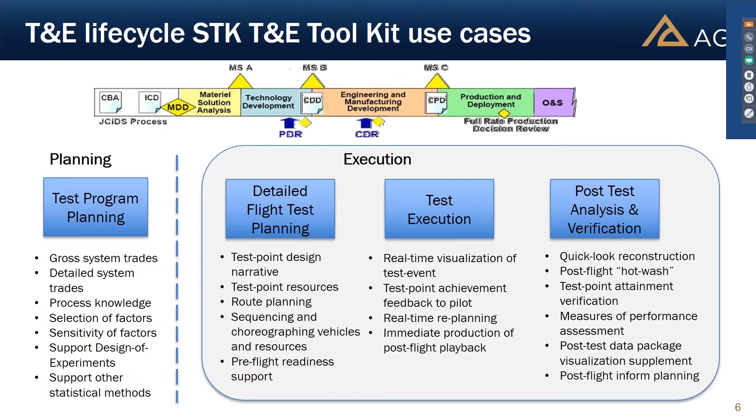Over time, we started looking about 8 years ago, somewhat prompted also by policymakers in the community that were calling for smarter test and evaluation techniques. We had a lot of folks using our software in the test community for lots of disparate use cases, and I really started looking at how to produce a tool set that could provide a holistic use across the life cycle of test, concentrating specifically on the execution phase of testing, detailed test flight planning, test execution, and post-test analysis. All of that was focused around a set of particular challenges that are somewhat unique to testing.

The test community more and more has complex systems for both systems and software, and that means that test point narratives and test cards are harder and harder for SMEs and flight test engineers to derive proper test point narratives and execute proper test point geometry in sequence test cards.

Modern systems tests have larger and larger quantities of data, much of which goes without being fully analyzed. It's often hard to mine test points out of these large quantities of data. It's necessary more and more to combine lots of different disparate sets of data together when doing post-flight analysis and verification. And test teams are often challenged when it comes to communicating system capability along with test point completion.

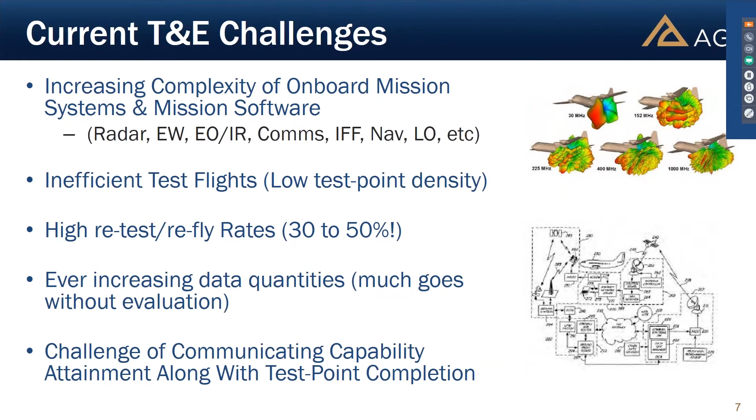We had a meeting some time back with Dr. Gilmore when he was the DOT&E director, when we were supporting the F-35 program, and he lamented that he gets report after report of test point completion, but would like a way to assess the state of capability attainment or the evolution of capability. And so that, again, becomes a significant challenge.

These challenges are all the more important given the high cost of testing. Cost per flight ranges from tens of thousands of dollars to upwards of $1 million a flight for complicated tests. Anomalies and unexpected difficulties sap resources and add to delays. And programs, when they get to the test phase, are often over budget, so the test phase is under pressure to hit milestones and control cost.

Test programs tool sets are often custom developed for each test team, and we've seen them to be labor intensive to produce, sometimes late to completion, usually lacking flexibility and interoperability between mission systems IPTs. Many times these tools are orphaned as their authors leave the test team, and they become difficult to maintain and or have to be recreated.

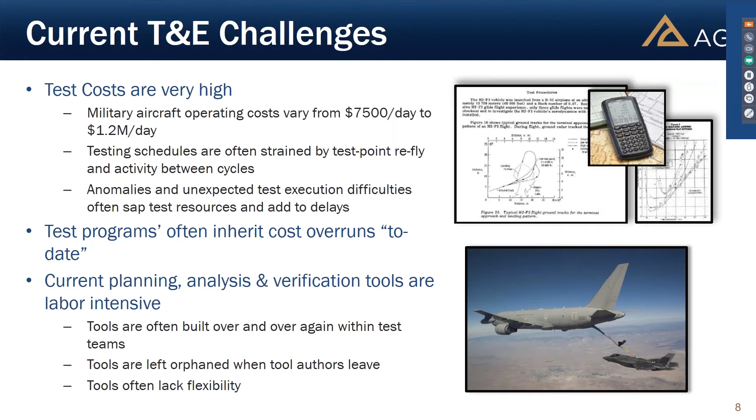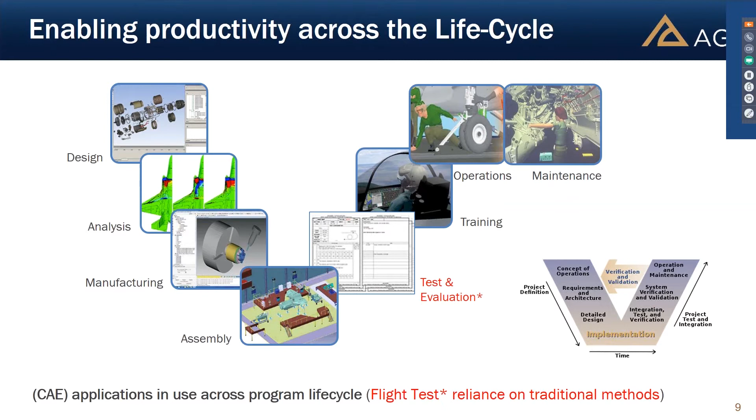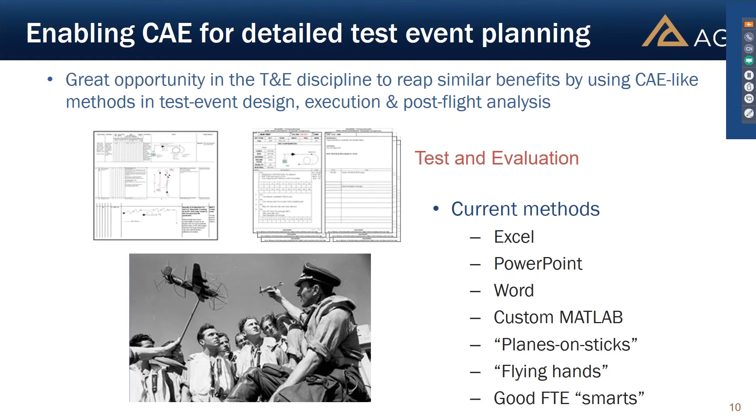We also took note some time ago that for years, most disciplines in engineering have enjoyed years of maturing CAD and computer-aided engineering tools, where test has largely had to rely on traditional methods and hasn't gotten the same attention from tool makers. This isn't a knock on test, but we've seen test groups using traditional methods for putting detailed test event plans together, designing test point narratives, assessing their viability, and turning them into sequenced test points flown on the range. That gets harder when weaving together test points from disparate mission systems on the same flights.

So what we're showing is a way to use a physics-based modeling environment in this commercial off-the-shelf STK tool set to characterize those systems to various levels of complexity, and then fly them around inside this virtual environment to assess the relative value of the routes being designed. There's a whole host of output in the tool set that provides feedback to the designer, post-flight analyst, or whatever user at whatever stage, so they can properly assess what's being done.

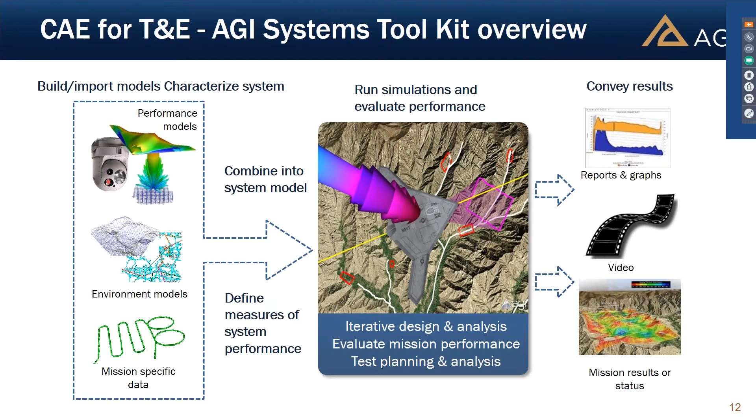Over the course of 29 years, these capabilities in the tool have matured. Within STK and the T&E Toolkit bundle, there's route planning, sensor modeling, communications, link and radar RF modeling, route parametrics, EOIR modeling, etc.

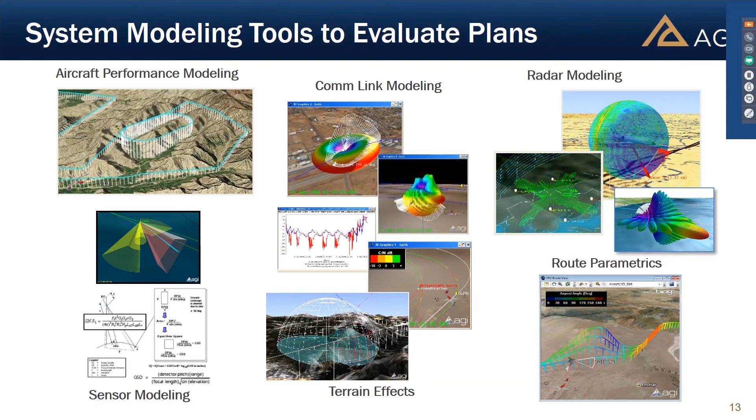This is brought together in a way that we can utilize it to support planning, operations, assessment, analysis, verification support, etc. We'll begin by looking at the detailed flight test planning aspect of that.

First, within the tool set there's a product called Aviator that allows you to characterize the performance of an aircraft. Once you have that performance model, you can click out routes inside the tool and the aircraft will fly appropriately. So if you click out a route, you can tell how much fuel will be used for one route versus another, or one sequence of test points versus another.

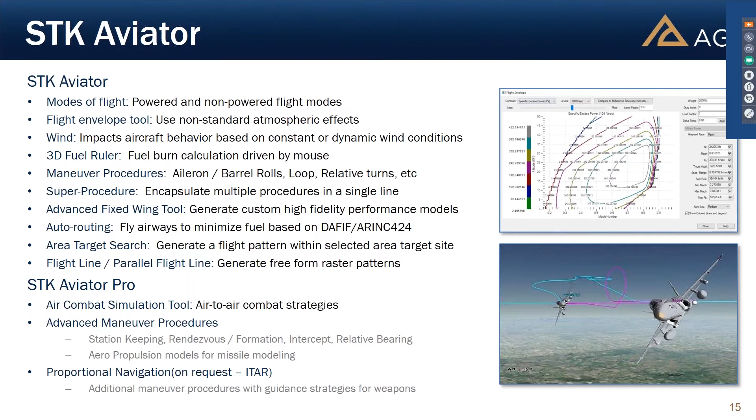That, together with the modeling described previously, comes together to provide a flexible and interactive environment to a flight test engineer, in which you can lay out a route and assess its relative value against requirements.

In this case, I'm looking at a simple route laid out at an aspect angle to an emitter. Any of the hundreds of different calculated parameters in STK can be hooked up to the route to show its relative value against your objective. Here, I'm just looking at aspect angle, so we're colorizing the route by aspect angle.

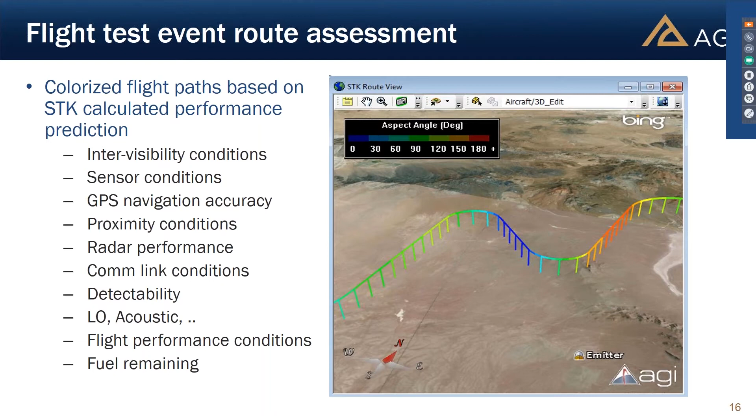In a sort of CAD or CAE-like fashion, I can activate that for edit and drag it around. As you drag it, you see the calculation change for the value of interest—in this case, aspect angle. So you can design that route to meet the condition you care about, and stack up multiple conditions, multi-constraint satisfaction, to determine the exact route that gives you on-condition geometry and timing.

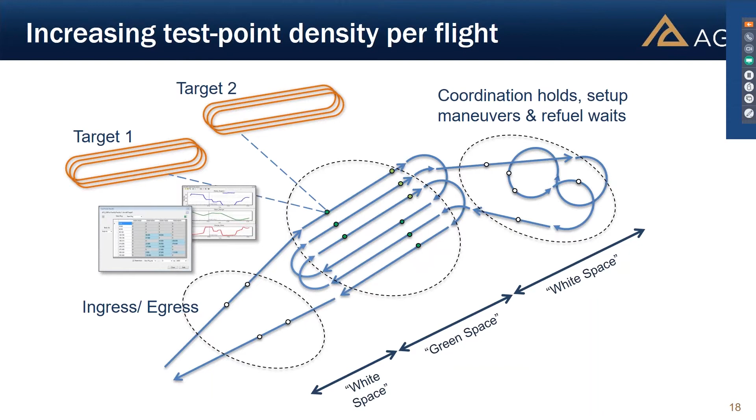So in the hands of a competent engineer or flight test professional, over time this would allow folks to design more test points into the green space of their route designs, and perhaps even harvest other parts of the route—ingress and egress, coordination holds, refuel waits, and that sort of thing—while assessing angles and performance conditions to targets, air targets, ground targets, etc.

We've seen directly that this can have an impact on effectiveness. This isn't to replace the smarts folks have when coming up with route designs, but it can be injected at several different places. For instance, SMEs doing...

requirements decomposition and detailed test point narratives can design those narratives, then refine and confirm them inside of STK, using it as part of the design process for the relative route conditions, and then sequence and choreograph a combination of those together. Ultimately, that would increase density and effectiveness and bring down refly rate as well.

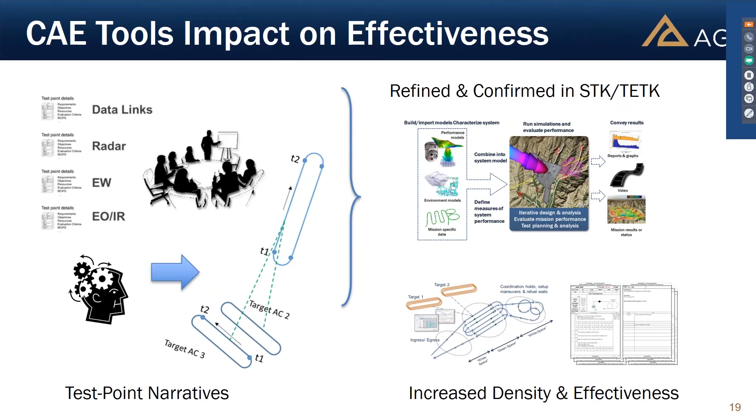We've taken this a couple of additional steps inside the T&E Toolkit. There's a tool that allows you to take requirements of a particular system and have the tool step through those requirements in parametric steps. It builds up a hypercube of answers for on-condition geometry and total time on condition.

So for instance, for this route combination in the center of the chart here, if I have a vehicle with a radar that has requirements in the upper left, and I want to get on-condition test point geometry in ranges from 5 to 105 nautical miles and 0 to 360 degrees in azimuth, with changes in elevation and range rate...

This can go off, and STK can calculate all of those answers and provide a hypercube, and then spawn tables of the total time on condition for each geometry. So the table on the top is for the geometry as seen. If I turn that route, the ownship route, 45 degrees and then have it recalculate, it would give you perhaps the table on the bottom that has a different set of answers.

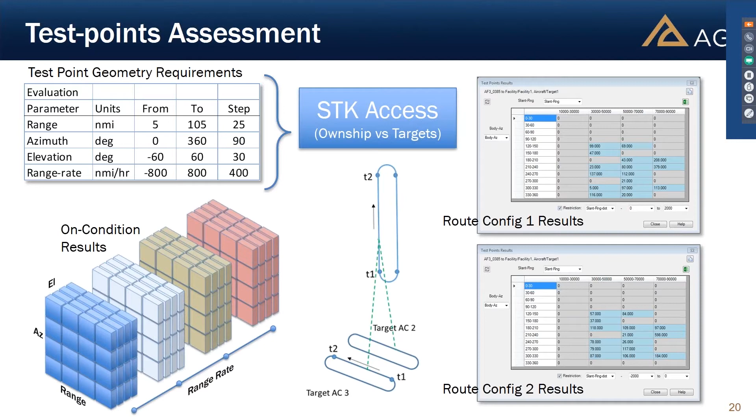So this is something that is typically done in a time-consuming way, with paper processes, and this could be brought down to much quicker with this kind of an activity. Large, complicated exercises that involve multiple maritime vessels, multiple aircraft, multiple radar conditions, and communication conditions and other constraints can be laid out inside the tool. These large, complicated tests are oftentimes difficult and time-consuming to produce, and need a way to validate their plans. This tool can provide a quick way to do that, and can be a significant risk reduction in that regard.

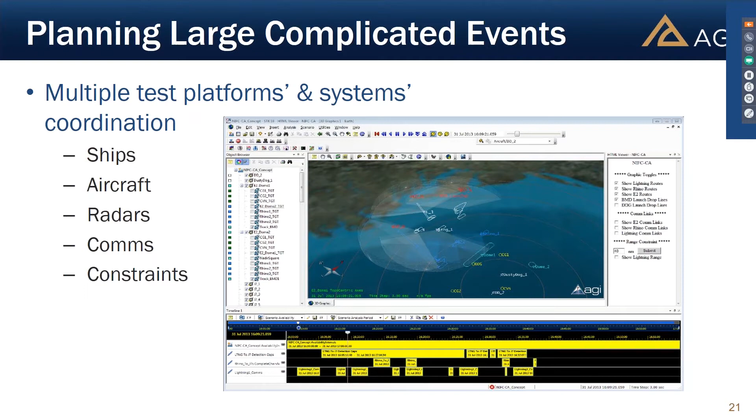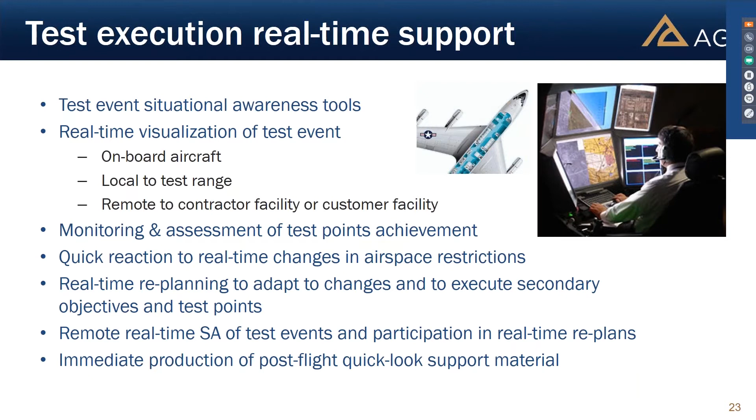I'm going to move on to the real-time assessment part of this. For a long period of time, AGI has had a way to easily incorporate post-flight data, real-time data into STK and assess what is actually happening with the route as the test unfolds. And that can be brought into a test environment, not just for the purpose of having a display similar to an IADS or other kind of display, but a little bit differently in the sense that having characterized the system as described earlier in these charts, and then having flown, let's say, the first 2 or 3 runs in the

actual test, an analyst can go into an offline analysis mode and then scroll back and forth through what just happened and see very quickly whether or not the test articles went through the exact geometry they were supposed to, whether the test points were achieved. So while the test unfolds, you can actually make decisions and communicate with the pilots. You could also go to contingency runs where you want to go back and try one or another run that did not meet objectives. This can have a big impact on refly rate, and we have customers actually doing this.

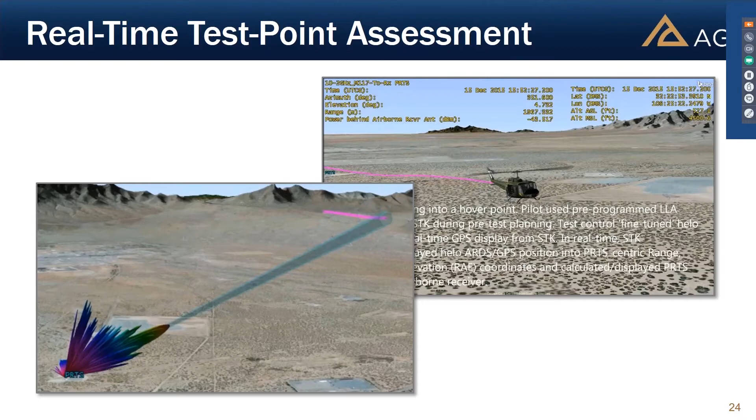So moving on to post-flight, we built a capability within the tool set to import data. Now, we rely on the fact that most programs already have a way to take their data off of a data pod or from telemetry or both, put it into a database that's indexed, that has unique metric names, and typically they'll have a way to extract that data into CSV files or HDF binary files, or they'll have a way to pull it out into MATLAB and various other ways. So we pick it up from there, and this tool can load those files and then turn that data into various objects within STK.

So for instance, the time, space, position information gets turned into ephemeris and attitude and covariance in STK vehicles. We turn pointing information into vectors. Any of the data in the data set can turn into scalars, which can then be used as additional decision aid graphics in the tool. Sensor volumes, radar scan volumes, any kind of measurement data can be turned into tracks, position and covariance, and then other sorts of supplemental data like FAA air tracks or AIS ship traffic can be turned into information in the tool.

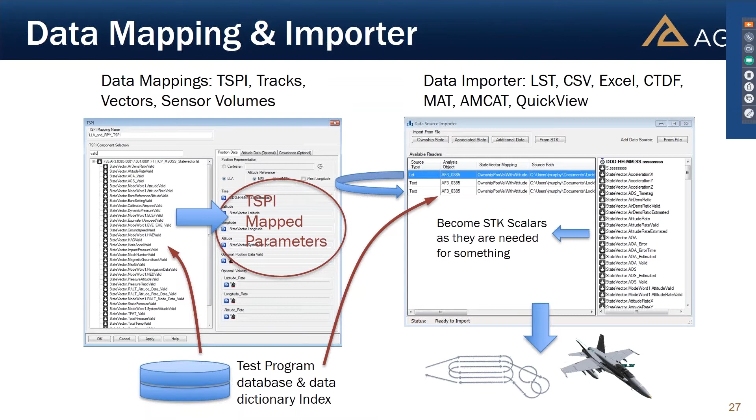Once all of that is constructed inside of STK, then you can perform quick look, flight reconstruction, track analysis, produce verification products, and produce visualization and animations in order to communicate capability and various other things. This relies on a mapping structure that we put together whereby you can map data from the data source, and then those things easily get turned into the objects in STK.

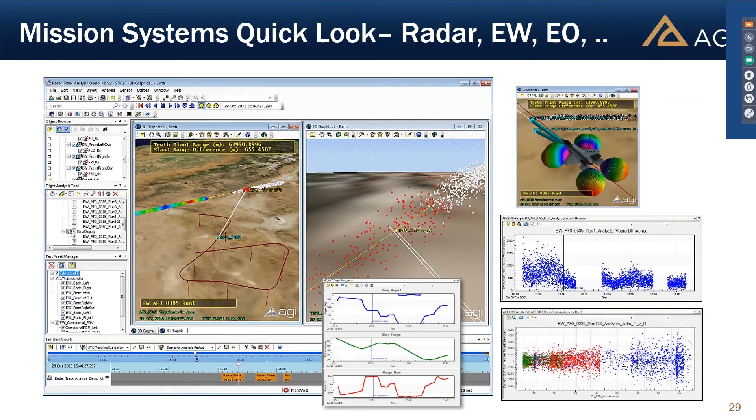Within the tool, you can quickly and easily create additional systems analyst visual cues. So, for instance, these are vectors, angles, planes, visual constructs that indicate where the antennas and RF receivers are, radars, etc.

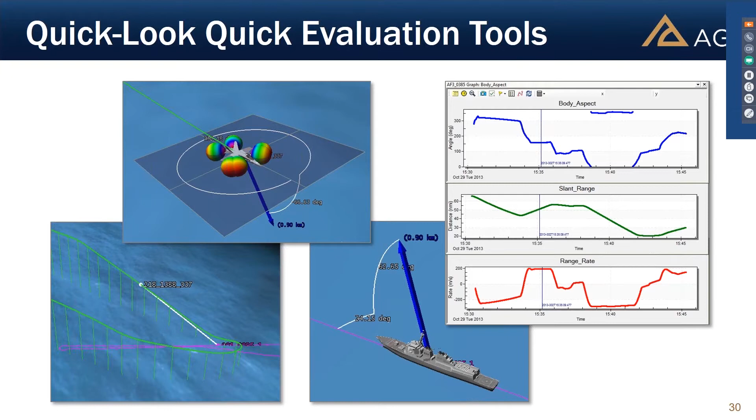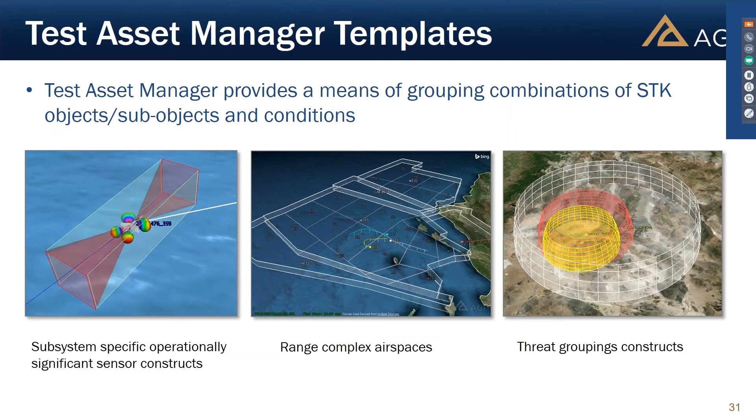It also enables creating combinations of those things that communicate specific things to the analyst. So in this case, subsystem-specific operationally significant sensor constructs, such as where and at what angles data collects would be good or bad for certain mission systems, range space, airspaces, threat grouping constructs, etc.

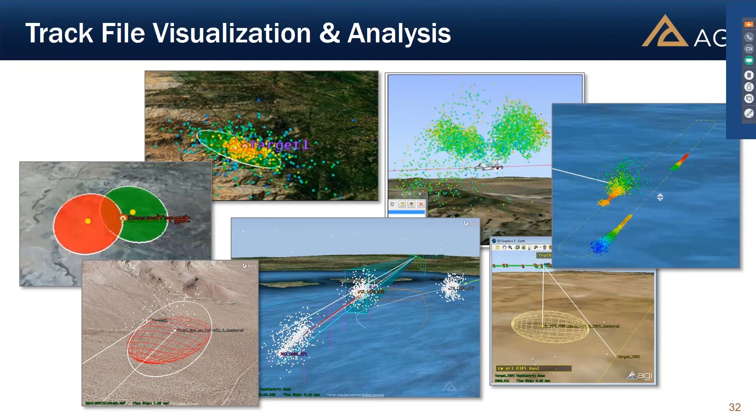One of the key aspects and one of the key workflows within the tool allows you to visualize track data or measurement data. Again, it can be from radar, electronic warfare data, emitters, EO/IR, and that can be visualized statically or dynamically. You can also wrap it up into different coordinate frames, and anything that's in the data set can be used to colorize the track measurement points in order to assess whether there's correlations between any of those parameters and the error, or just to better understand the behavior.

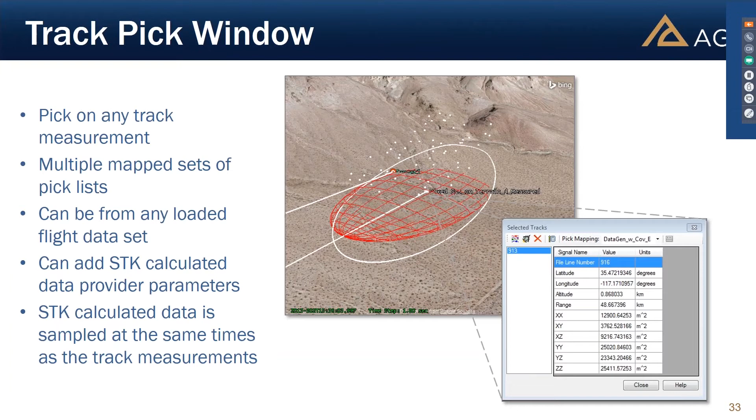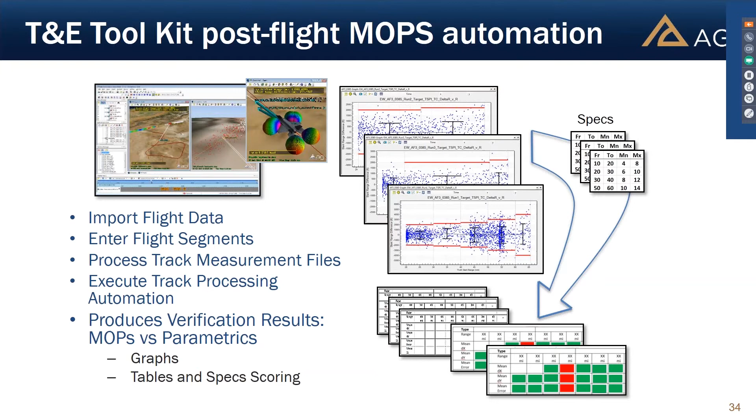There's a track pick window that lets you inspect the data. You can put as many parameters as you like in there. And ultimately, it provides a way to produce verification products. So you can do track to truth comparison, compare with specs, and then produce scoring results. And we've seen most places that do that are producing different kinds of measures of performance.

We've built workflows within the tool to allow you to produce products such as these. And we've seen folks doing that with MATLAB and other tools. This is meant to be for those that don't have those tools, they can do that in here. It also provides a valuable supplement to those tools because when everything's green, it's all good. But when you're out of spec, it's oftentimes difficult to figure out with those tools why you're out of spec. This software excels at being a forensics environment in that case.

And we have real examples where folks have used this to understand a system, find problems, inform test planning, cases in which that activity saved them from failure on multi-ship million-dollar flights, cases in which evaluating these things led to informing software development of issues that got fixed in a build earlier than they would have gotten fixed, which rains goodness into the Gantt chart of the ongoing schedule.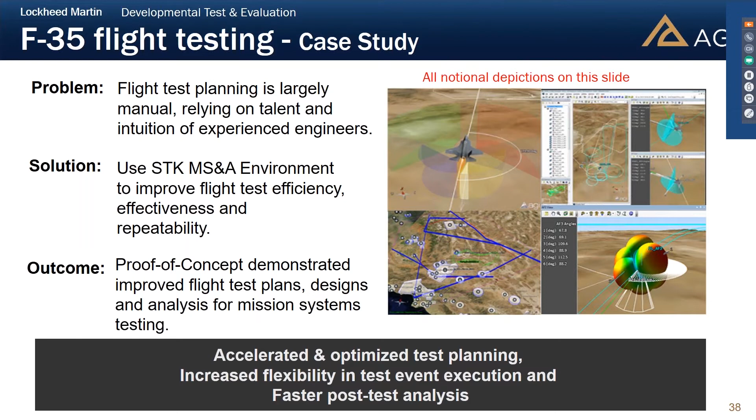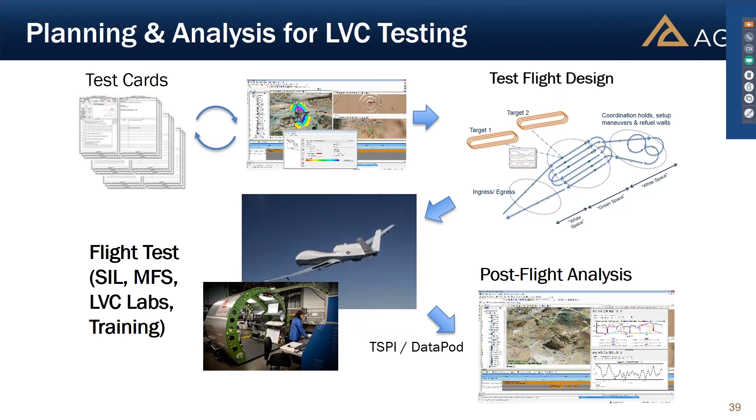And we have been out actually implementing these concepts with the JSF Task Force and with other projects within NAVAIR and NAWCWD and some other places. Everything we talked about for open air testing also applies just as well to labs, LVC tests, anechoic chamber, hardware in the loop. All of those activities require creating test designs that need to be proper and can be analyzed and verified, as well as they produce a lot of data. And the same way that you can reproduce and do post-flight from real flight data, you can do from lab simulations, modeling and simulation, and such.

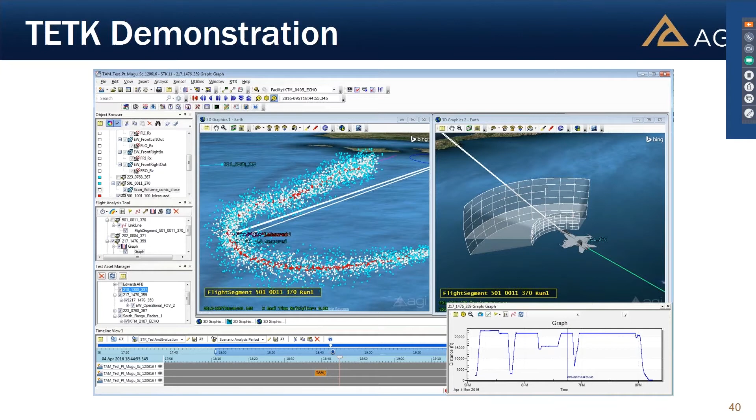So we're going to move on to a demonstration now, and we're going to pass it over to Chito. All right, Chito, whenever you're ready, just press the accept button and it'll make you presenter. Okay, thanks, Maggie, and hopefully you can see our screen here. Yep, we can. So, great.

What I'm going to do is give you a quick introduction to our T&E toolkit. And to do that, I'm going to talk about a notional flight test, and we're going to focus more on the post-flight analysis of things. The flight test will be coming out of Edwards Air Force Base and flying against a couple of air targets on the sea test range off of the West Coast.

So let me go ahead. First off, I apologize if there's delay in the GoToMeeting with the animation and the response of our 3D window is slow. That's just an artifact of going through the web.

So let me first bring up some data. This is the T&E toolkit toolbar, by the way, when you do install the T&E toolkit.

So we have a data importer here, and the first thing I'll do is load in some ownship state data. And we have some sample data here that's just a CSV format. And we first have to give it an identifier and a test ID number, if you like. And then here's that TSPI mapping, the time, space, position information that Joe mentioned earlier. I'll go over this sample ownship mapping in a second.

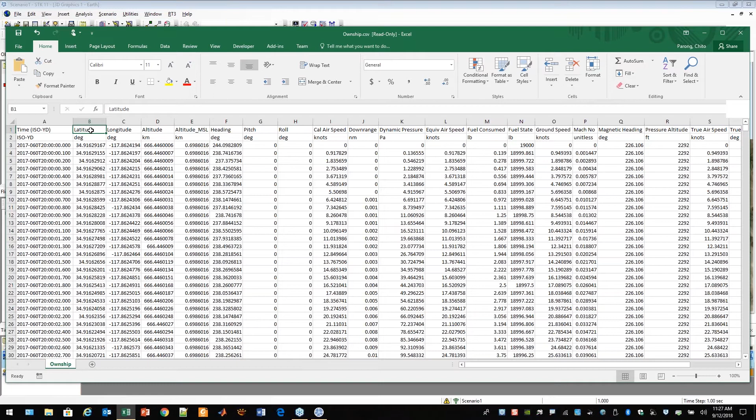And you'll notice that this data set has the name of the data element on the first row and then the units on the second row. And the goal here is to make sure that we understand what this data element is with respect to STK. So we need to do that mapping that we keep talking about. And let me show you a quick mapping of our TSPI data.

So based on that Excel file that I just showed you, we basically mapped this time in our data source to an STK property, which is time as well. And then, of course, the latitude, longitude, and altitude for the position. And then we'll use heading, pitch, and roll for the attitude of the aircraft.

All right, even with just the aircraft flight path here, we can do quite a few things. One thing we can show you real quick is we could add a data display to our 3D window here, where we can add things like our altitude, we'll do that in feet, maybe calibrated airspeed, dynamic pressure, and even fuel consumed. So all these data sets that I'm bringing in came from the file, and we're just going to go ahead and put that in, and you can see as we animate our scenario, all those parameters will be in sync with where we are in our scenario.

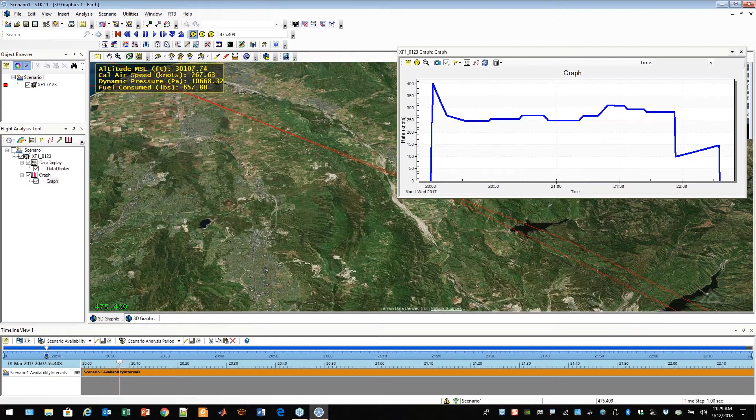All right, some other things that people normally like to use is to graph some of this data, and here we can graph some of this additional data that we brought in. For example, back to our calibrated airspeed, we can load in a plot of airspeed versus time. And I think Joe also mentioned that we can also colorize the flight path based on some metric. And in this case, I'll just quickly show you how to do that using that same example for calibrated airspeed.

For example, if I'm interested in the flight path between maybe 250 knots to 300 knots, I could add that in as a level, and 300. So if I wanted to show between 250 and 300 in green, and also show less than 250 in red, and then greater than 300 knots in blue. So you can colorize your flight path based on pretty much any metric that you could bring in from a data source like that Excel file.

All right, let me turn these guys off just to move on to other things. So again, we were going to mention that this aircraft, this ownship, is going to be flying against a couple targets. So let's go ahead and load those targets now. And we usually call those associated states. And we have target 1. And we'll rename this guy target 1, and give it a 3D model. In this case, we're going to just use a simple F-16. And again, it's an aircraft with that sample TSPI mapping, and load that into our scenario.

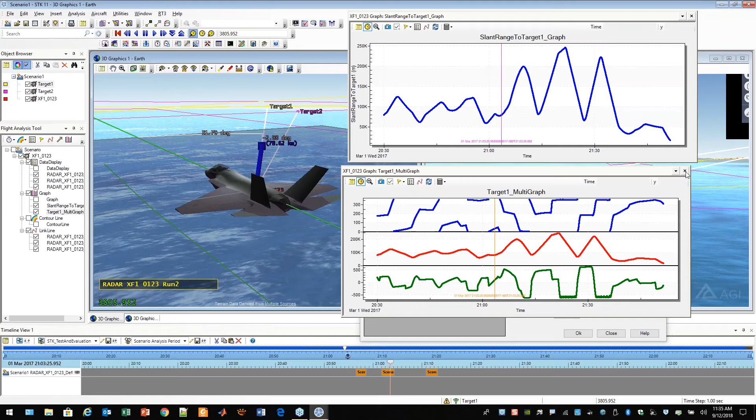So again, we weren't doing any track analysis or anything just yet. We were just looking at the geometry, the relative geometry between own ship and target. And this gives us a quick look of what that looks like. All right, so now it's time to load in some track data. And again, this is additional data that we're going to load in. These are going to be the measurement tracks or the measurement data from own ship to these targets.

And we have something here called air tracks, just some notional data that we brought in. And let me bring up the mapping for those tracks, just to show you. So we do have, for this particular track file, the latitude, longitude, and altitude of those tracks, and then the measured tracks. And then we also have some covariance information. And we have some additional data in here, like the sensor ID, some range quality, and data valid. And we'll talk about the sensor ID here in a second.

So this file that we brought in is actually for a multi-sensor kind of measurement. And so there's different types of sensors on there that we're measuring against these two targets. So let's go ahead and introduce our workflows to do that track analysis. We do have these custom workflows built into T&E Toolkit. And you'll notice there's several of them. We're going to look at just a couple of them in the time frame that we have.

You'll notice that there's other things in here like track events for weapon systems and creating sensor volumes, and even some ATC data that you could bring in for some ATC assessments. So we're going to focus on this tracks workflow. We're going to go ahead and create a new track object here. We'll just give it a name, and again, that air tracks mapping that we just created. And you'll notice down here is this air tracks pick info, and I'll show that later on, but that is just a way to click on a track point and get additional information on it.

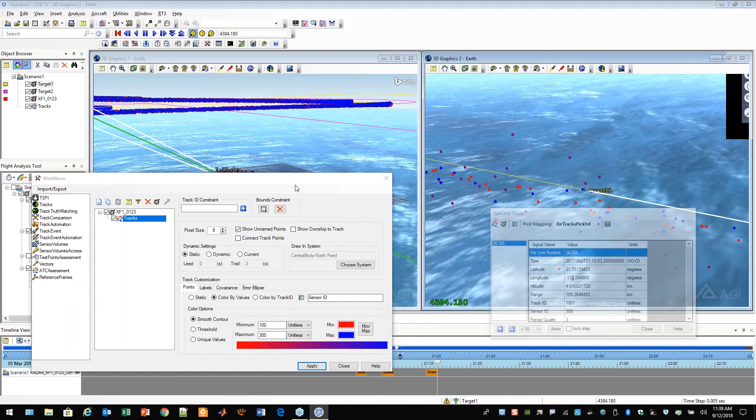Okay? And we can further filter this if I'm interested in only looking at the sensor 100 tracks in this scenario. So there is a filter capability here where I could explicitly select my sensor ID and specify 100. And then I apply that. Now only the tracks that are from sensor 100 show up here.

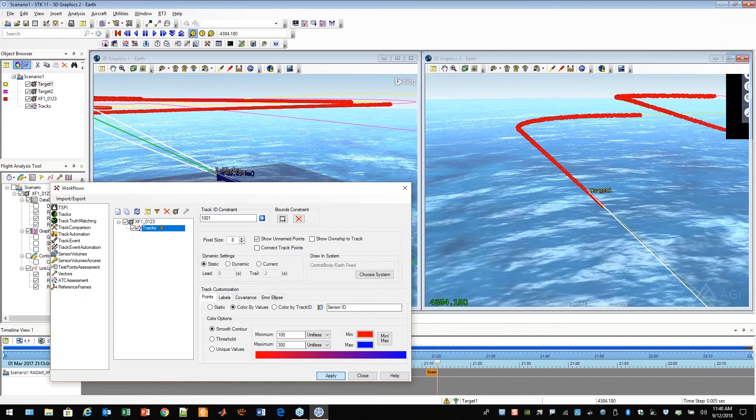And then I can also further constrain that and say that I'm only interested in looking at our target 1 and not target 2. And we'll go ahead and do that. And now we only have the tracks for target 1 and no longer for target 2. So this is where we normally take a look at the track data and determine, you know, how good is my measurement compared to my truth data, which is our target 1 TSPI data shown here.

One more thing I'd like to show before I continue on here, but I'll leave this up for a second. So to do that comparison, I'm going to first promote this track so that it creates an aircraft object in STK. And you'll see here, it's shown here as tracks measured. And basically then we can use aircraft to aircraft to determine how good our measurements are to do that track comparison.

Let me go ahead and add in here another connect line between ownship and that tracks measured object here. Let me select that in here first of all, create that connect line. So now we can see that line, 2 white lines going to target and the measured track.

We can now do the track comparison, and that's another workflow here, and I'll try to do this real quick. Just select the tracks that we just created. The ownship is XF123, and our truth object is target 1. Our measured object is tracks measured. We're going to use the north-east-up or whatever reference frame that you have your data measured in. And we're also going to use a time interval, in this case, the run 3 that we have. I'm going to click OK.

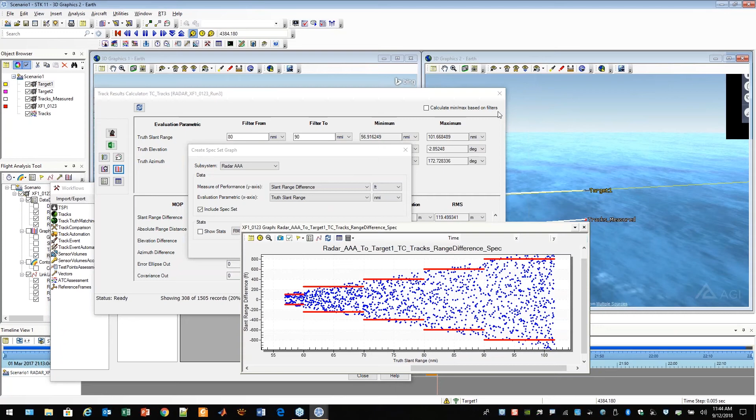And what's nice about this plot is, again, we can go in and click on a point that's, say, outside of our spec line, and see what condition that was that created that out of spec condition.

Or if we're really more interested in a group of points, we can go ahead and create these track events or event markers and rope off a bunch of these points that are out of spec.

And then in the 3D window, those points will show up as event markers on our flight path, and that could give us further clue into why we were out of spec for that particular track point.

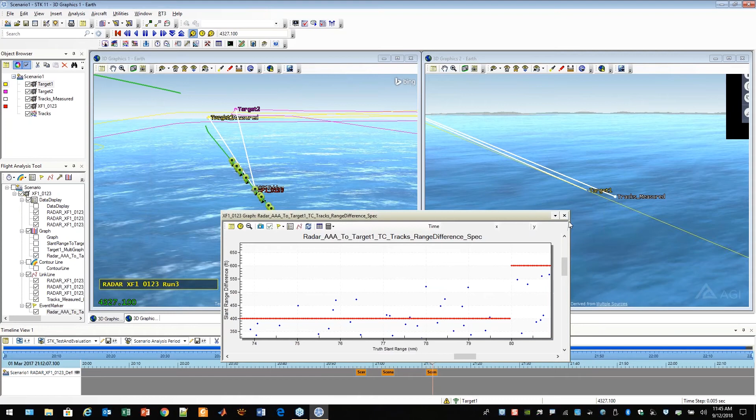All right, I think I'm almost out of time here, so there's one more thing I'd like to show. Going back to our tracks workflow, I didn't mention that we did have a covariance tab, and we had covariance data we loaded in, but we're just going to go ahead and load in this.

So basically what we see here is our covariance, position covariance ellipsoid, and let me move on to a particular point in time. So if I step through this, if the truth object, in this case target 1, is inside the ellipsoid, then it stays green.

And then if I kind of step through this one step at a time, there is a point where we go outside of the ellipse, and let me speed that up just a tad.

It turns red when the target is outside of that ellipsoid, and that's another way to visualize the measurements of the measurement track data that I have.

So I think that's it for the demonstration. I'll send it back to Joe.

Thanks a lot, Cheeto. Great. I'm just going to make sure we switch presenters here. Thanks, Maggie. So at this point, we're going to go to questions.

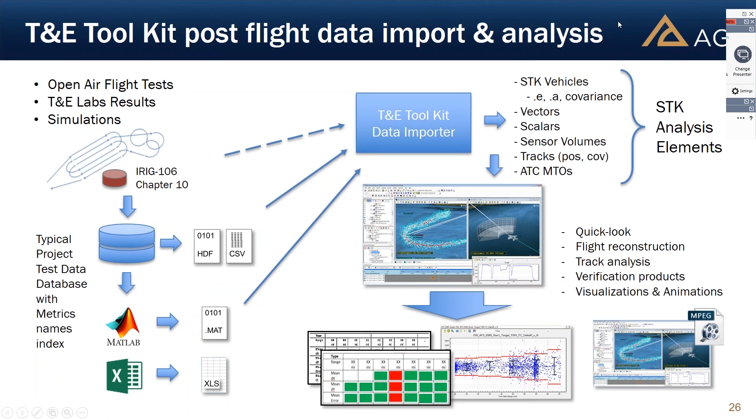That's all the questions that we have. Do you mind going back to the slide that talks about all the tools and products we talked about? Sure.